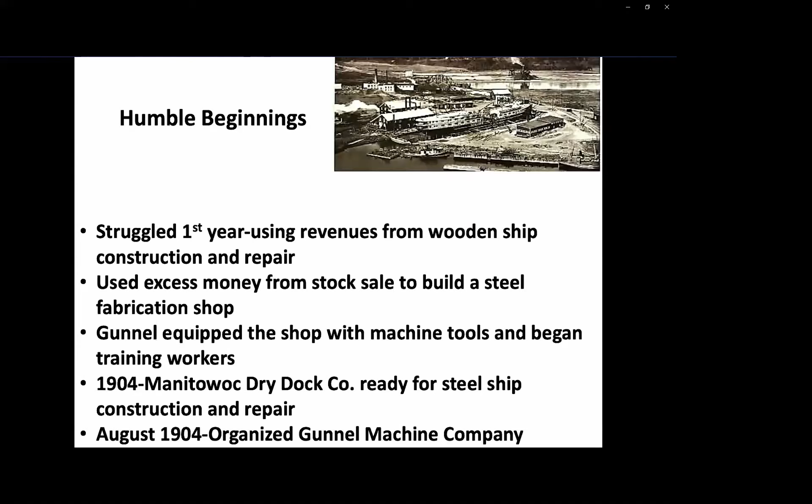Also in August of 1904, Mr. Gunnel organized his machine company.

So growing the company, one of the hallmarks and one of the things I always heard all the years I worked for the Manitowoc Company was: you must diversify. It's the three-legged stool. When I worked there, it was shipbuilding, cranes, and ice—three-legged, diverse businesses. So the Gunnel Machine Shop built the winches, the hoisting gears, and machine parts.

The goal of these gentlemen was to grow the business and manufacture all the major components for shipbuilding. So in 1909, they purchased the Manitowoc Steam Boiler Works, which gave them the ability to build their own boilers for shipbuilding, but also diversified into building digesters, furnaces, kilns, dredge dippers, ladles, buoys, and heavy buckets. They continued to make purchases, acquiring the Manitowoc Foundry Company, which gave them sources for casting.

In 1910, they delivered the steel hull Alabama, which at the time was considered the finest passenger vessel on the Great Lakes. Mr. Gunnel was the leading designer on this, also overseeing all of the production, including the first steel plate that went down to the very last joiner workpiece that went in.

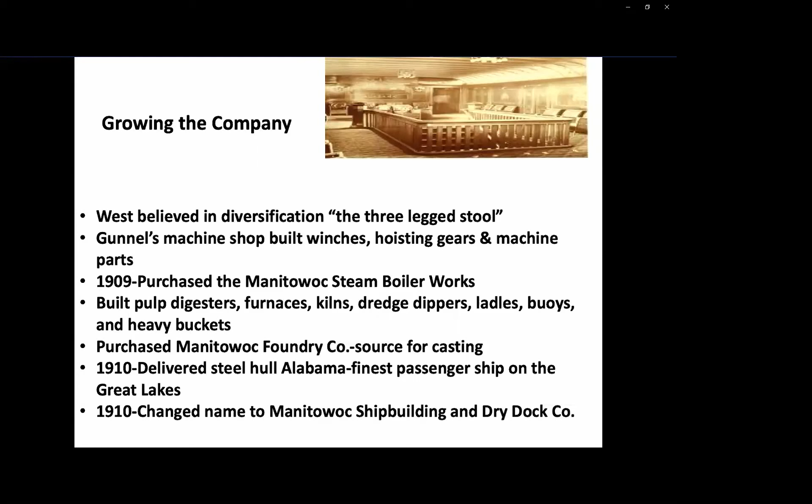Of course, as they went through history, World War I was looming. In 1916, they received orders for freighters from Norwegian and British companies. However, the U.S. Board of Emergency Fleet stepped in and purchased all the freighters under construction for their use, and the Manitowoc Company delivered 33 of those freighters.

Mr. West was also very highly regarded in the shipbuilding industry, and Henry Ford had started a shipyard in River Rouge, Michigan, to fabricate submarine destroyers known as the Eagle boats. However, they did not have the know-how to get that business started.

So it says that Mr. West was recruited. I feel as though he probably had his arm twisted by the government in order to go there and get that going. So here's another hallmark.

They sold $500,000 because they knew they had to upgrade their shipyard for a shipyard expansion. The shipyard then occupied the entire peninsula. They had 65 buildings, 7 cranes, telephones, floating docks, and railroad systems throughout the yard to bring materials in, to bring pieces to the build site, and to transfer sections. It was considered to be an extremely modernized shipyard.

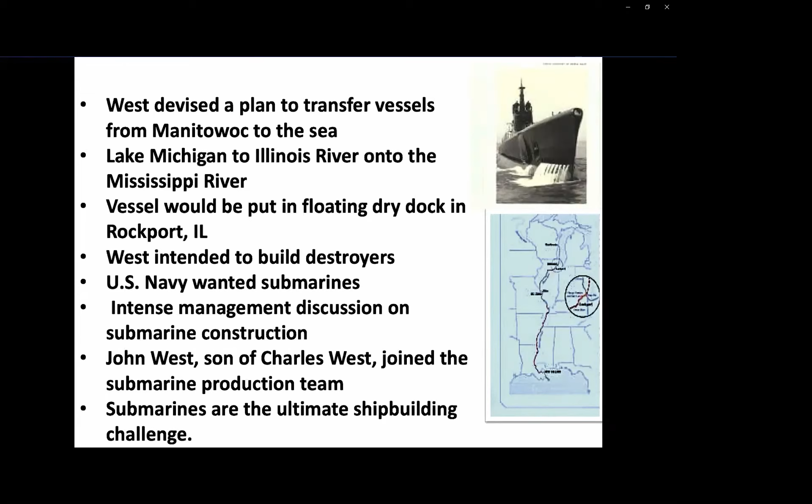One of the other things they did was bring in John West, Mr. West's son, to join and head up the submarine production team. Submarines are the ultimate shipbuilding challenge. I have a picture of one of the submarines in the dry dock that they built during World War II.

So the Manitowoc construction team was a little uneasy going forward with building submarines. The government said they would form a partnership between Manitowoc and Electric Boat—and Electric Boat still builds nuclear submarines for the United States Navy even to this day.

Mr. West also had a relationship with the gentleman running Electric Boat. During a tour, they were walking the shipyard together, and Mr. West looked at what they were doing and said, 'Damn it, Armin, if these fellows can build submarines, we can too.' And that was it—that was the decision. They were going to go forward with submarine building.

The agreement was formed with Electric Boat, where they would help with technical design and put personnel into the shipyard to oversee construction. In September of 1940, Manitowoc received the contract for the first 10 Gato-class submarines.

The submarine construction was to take place indoors. They were very concerned about contamination and weather conditions, so the decision was made that these submarines had to be built indoors.

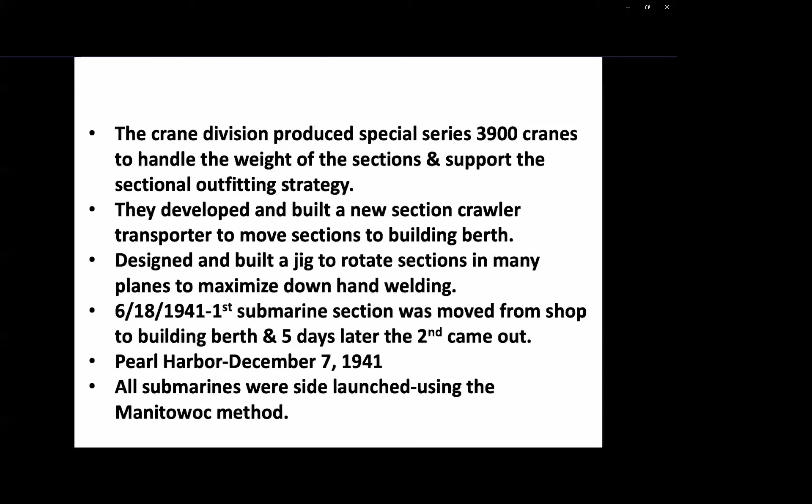All submarines were side-launched using the Manitowoc method. The United States Navy at the time was very fearful of this method. Manitowoc engineers convinced the Navy, and they did a series of testing in order to prove that this method was safe and was the best way of doing it.

So I have a picture of the Manitowoc in the time building sections. You can see them lifting a section with their 3,900 cranes onto the building berth.

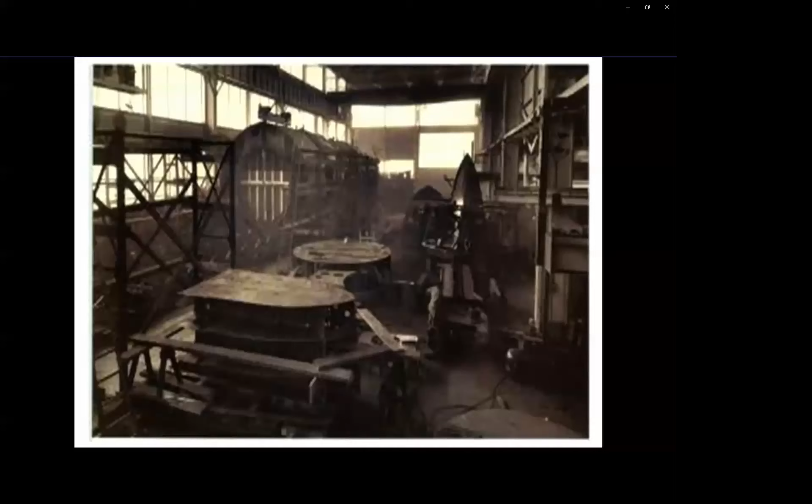A shot of the shop, and you can see some of the sections from the submarines, and you can kind of make out the jigs, the turning jigs that they designed for turning parts and pieces of the submarine in order to assure welding quality.

And here we have a picture of the submarine out on the building berth where they're joining the sections together.

And a picture of the shipyard during World War II. The square building that you see is actually the main office building. It has an interesting history. They moved that building using their dry dock to this area on the peninsula, and then it was remodeled during World War II.

And of course, a picture of the famous Manitowoc side launching of submarines. The original thought was that they were going to take the submarines to the Gulf and do the tests down there, but the government wanted the submarines badly, obviously, after the Japanese attack, and so sea trials were taken off of Sheboygan in 300 feet of water.

In February 1942, West was called to Washington, D.C. to also build new landing crafts to ferry tanks and equipment. Manitowoc designed and built the first 36 of these units and were the lead yard in 400 more units. The units were designed by the engineers at the time to be bolted together, so steel plates could be manufactured throughout the Midwest, brought to Manitowoc, assembled, and then delivered.

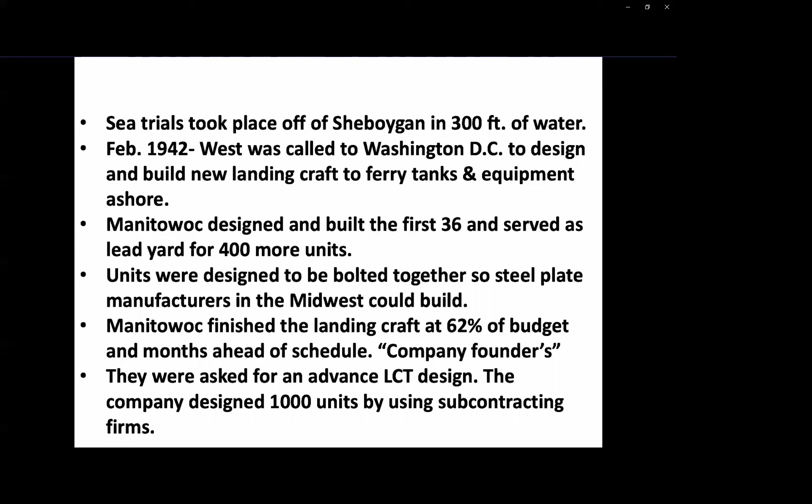In June of 1942, the Manitowoc Company was awarded the Balao class submarines, a little bit different submarines than the original ones, an upgrade from the original ones that they were building.

Their crane market was also going great guns. They sold 278 cranes during the war to the military. Peak employment in the little city of Manitowoc was 7,000 people. Time magazine at the time wrote an article that referred to the workers as cheesemakers and cherry pickers. Mr. West took great offense to this statement. Workers were trained under the Gunnel Plan and were some of the most highly skilled workers in the country.

Manitowoc built a greatly detailed wooden mock-up of the entire submarine, all the pipes, all the gauges, all the wires, everything in a wooden mock-up. And that mock-up was used and saved them a ton of time by the engineering and the construction group.

And in remembering what happened to Mr. West in the First World War, Mr. West was already planning in 1943 for the direction of the company in the post-war era.

Some of the things that were happening, just interesting, they had a little newspaper that the company published called the Keel Block, and that was published well into the 1970s, 80s, 90s. It's a piece of communication between the management team and the workforce. During World War II, they had a women's softball league. They had their own hospital.

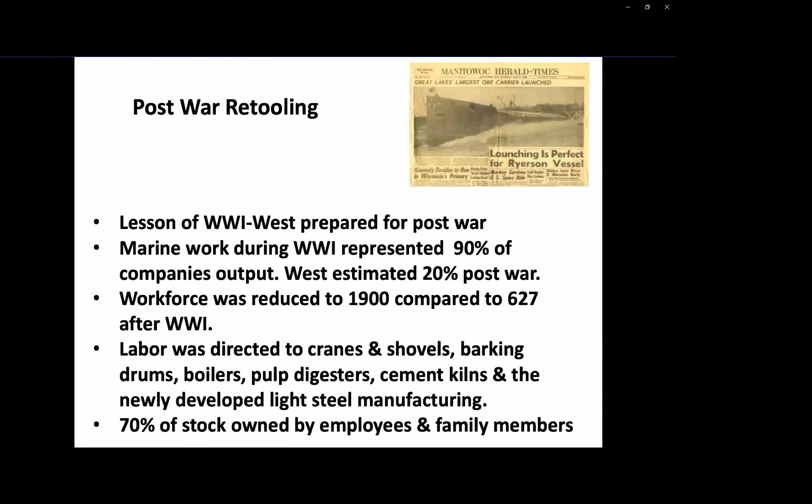70% of the stock owned by the companies were employees and family members. Remember, after World War I, they were forced to sell the company because the stockholders that held the stock wanted their money. Here, the stock was owned by the employees and family members. The stockholders were paid a 3.25 dividend. The company was debt-free. So they moved past the war.

In 1950, the Bradley Company line of U.S. Steel awarded a contract for the John G. Munson, Hull 715. This was a mammoth ship at the time. It was 660 feet long, and it was a self-unloader. A very large ship.

In 1952, Manitowoc Shipbuilding Company became Manitowoc Company with two wholly owned subsidiaries, Manitowoc Shipbuilding and Manitowoc Engineering Company. John West, the son of Charles West, was promoted to president.

A lot of their business after the war was also in converting and retrofitting many of the ships. And also during the 1950s, they received orders from the American Steamship Company for the John J. Boland, the Detroit Edison, and the Adam E. Cornelius.

Shipping companies were demanding, however, that larger capacity vessels with fewer men be built. This is what the customers were telling Manitowoc Company. And a sad day, Mr. West, the original founder, died on 10/3 of 1957 at the age of 80.

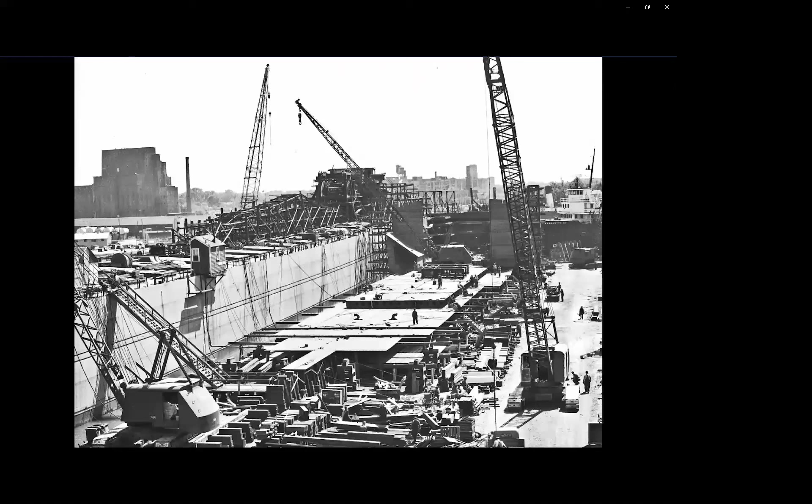Here's a picture of the Manitowoc Company building one of those large vessels up on the ways. You can see the number of cranes that they're using. You can also see some of the conversions and some of the repair work that they're doing. Very, very busy shipyard. Not as busy as World War II, but very busy. They had gone from military work to commercial work.

In 1960, they received the contract for the Edward Ryerson. It was 730 feet long by 75 feet wide, the most powerful, largest vessel of its day on the Great Lakes.

And then what happened? There were some game changers that happened. In 1968, the Poe Locks at Sault Ste. Marie opened, allowing for 1,100-foot ships to transfer from Lake Superior to the lower Great Lakes. In 1970, the Merchant Marine Act allowed the Great Lakes shipping owners to gain guaranteed government mortgage loans.

There was no room for shipyard expansion in Manitowoc in order to meet the needs of the future shipbuilding. And of course, the Jones Act, which requires that all ships that start in a U.S. port and end in a U.S. port be built in this country.

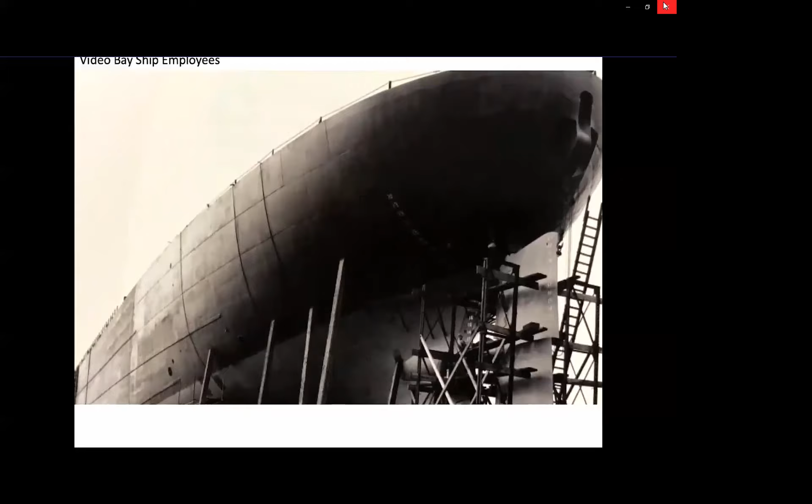I originally started at Manitowoc in 1952 at the shipyards. In 1972 we moved to Bay Ship here. The building program started in 1972, and we began down south in the South Yard building the smaller boats. The first 1,000-footer had its 700-foot section built down south, and the 300-foot section built up north here, and that led into the stern section being built, before the graving dock was built.

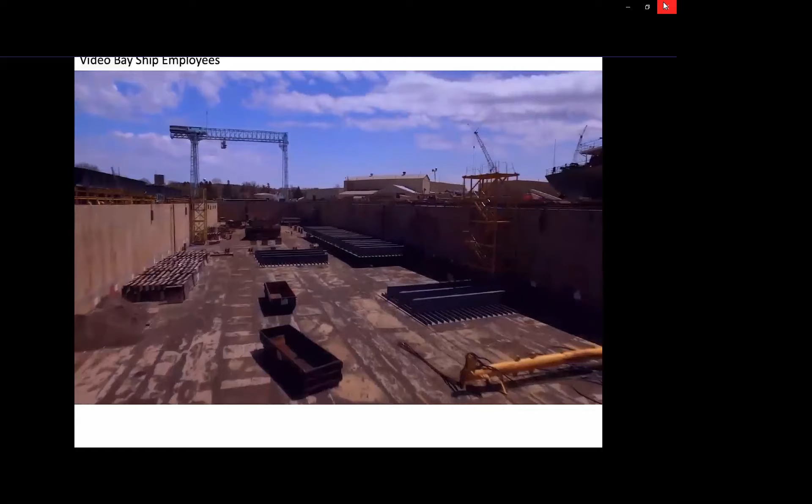I think the graving dock opened up the ability to construct 1,000-footers and also the ability to dry dock 1,000-footers and work year-round to not only do new construction but repair work. So both of them are a key part of the business plan.

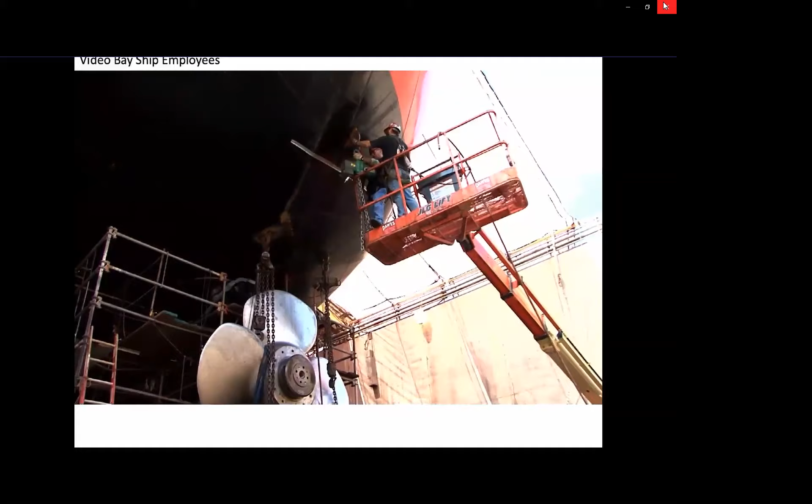The job I did for the last 25 years at one time was done drawing and nailing on the floor. I draw the boat out full size. And then 25 years ago I moved and started computerized lofting on AutoCAD. Did that for the last 25 years.

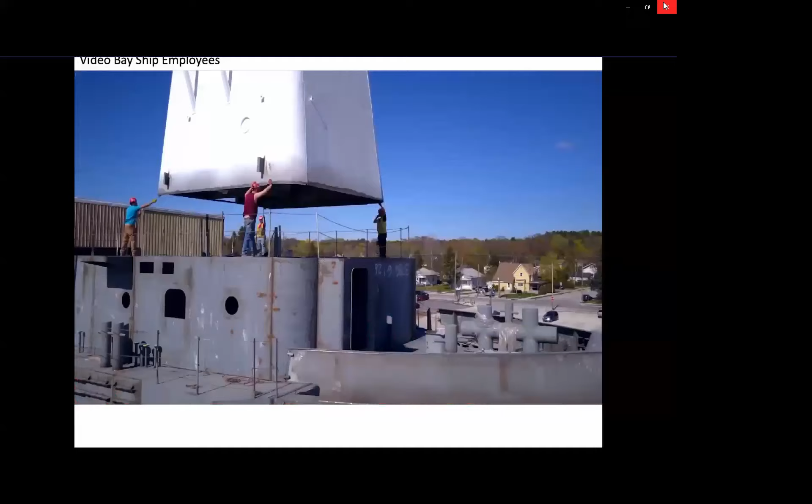I don't think there's anybody that lives in Sturgeon Bay that either hasn't had a family member or doesn't know somebody personally that either works here or has worked here. That's how deeply rooted this facility is and this business is in Sturgeon Bay.

Well, it's quite important here. Years ago there were quite a few facilities on the Great Lakes in the shipbuilding industry, you know, Toledo, Lorain, Superior. Some of them have gone by the wayside over the years. So we're one of the ones that held in there and stuck with it.

The jobs attract people. They come from all over, mainly northeastern Wisconsin, but also upper Michigan, and all over the United States actually. And each of those brought something to them that they can help the community with or add to the community, or brings up the level of experience in our community.

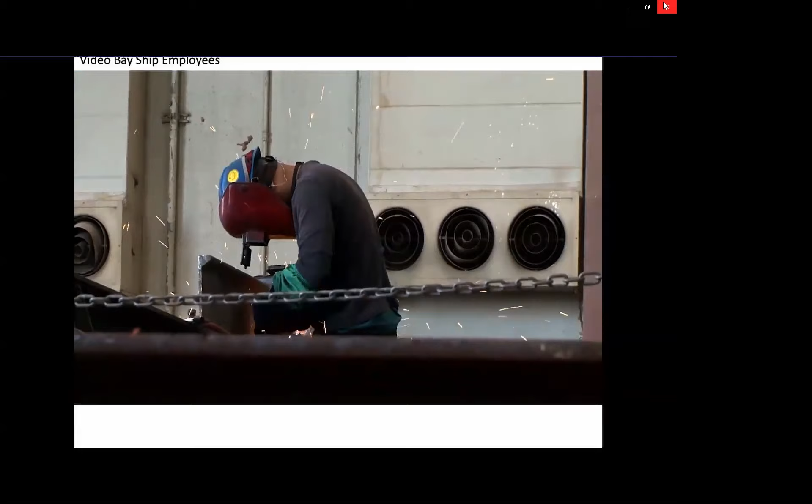Bay Ship has really been kind of silent about what they do in our community, and they don't really seek out a lot of attention, but they really do commit. I mean, not just in terms of what they do for payroll and the money that flows through our community, but just in terms of donations and helping our community out.

Shipyard, in my opinion, is everything to the community. It's the most impressive event about Sturgeon Bay. When you go around different places, we were fortunate enough to go to Europe last summer, talk to the Fincantieri people in Italy, and get pictures of the shipyard where you work, and everybody knows big ships and likes big ships, so it's kind of a worldwide thing.

I think there's a great deal of pride in building a quality boat, and the size of the vessels amazes people. Well, the nice thing about Bay Ship over the years is that we've established a partnership, I think, between local government and the business community, but specifically Bay Ship.

As a result of that, I hope the city has been able to help Bay Ship grow. And the amount of dollars that flow through our community as a result of Bay Ship, it just can't be taken for granted. I mean, we always have to make sure that we're doing everything we can to make sure that Bay Ship stays viable, that they're profitable, and that they continue to employ thousands of people.

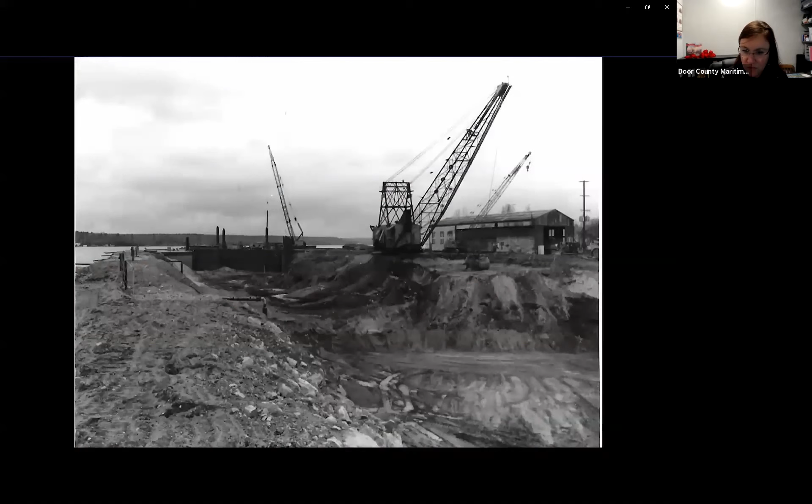This is a picture of them digging the graving dock. You can see it's a very massive hole. On the far end of the picture, the very first thing they did was pound piling to make a piling wall to separate and keep the water out, followed by the gate structure that also was intended to keep the water out.

Now I think what we'll do is a little bit of a flyover to take a look at the facilities.

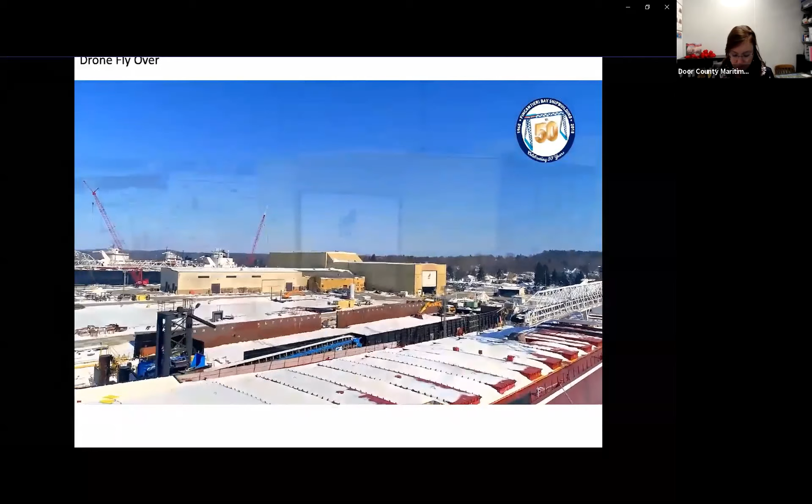So I have some pictures of some early vessels that were built. Hull 716, the first of the 1,000-footers, the Belle River. She was 1,000 feet long, 105 feet wide, 56 feet deep, with a capacity of 80,900 gross tons and an unloading rate of 10,000 tons per hour. It was propelled by four 3,500 General Motors Electro Division EMD engines, had 37 hatches, and was built in 1977 for the American Steamship Company. It is now currently known as the Walter J. McCarthy.

The second of the 1,000-footers, Hull 717, the Lewis Wilson Foy, was much the same. The third, Hull 718, was the Gott. The Gott was a little bit of a different animal; it did not come out with a swing boom, it had a shuttle boom instead. It also did not have EMD engines, but two 19,500 diesel engines. Those engines have been removed and repowered over the years, and a swing boom has since been put on this vessel in place of the shuttle boom.

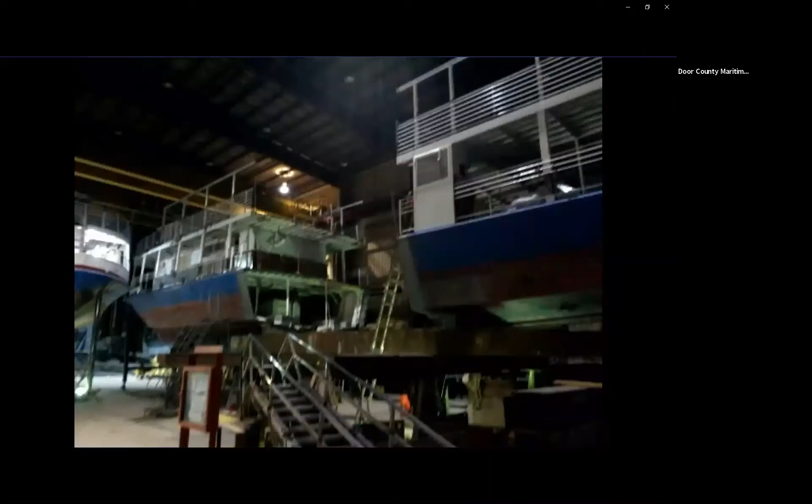We also built 2 boats, the Evening Star and the Morning Star, for a customer in Chicago, kind of a passenger tour party boat, so to speak. A little bit later, we received the contract to lengthen those 2 vessels along with one of their other vessels.

This shows a picture of how we brought the vessel into our 311 construction building. We cut it in half, pulled it apart, and set a new section in. Lowered the section in, welded it in place, and re-outfitted the ferry boat. Then we put it on our section carrier and brought it outside where it was finished painted.

We built our Hull 752, which was an ice class ferry boat, the Arnie Richter, for Washington Island ferries. There's the Bright Star.

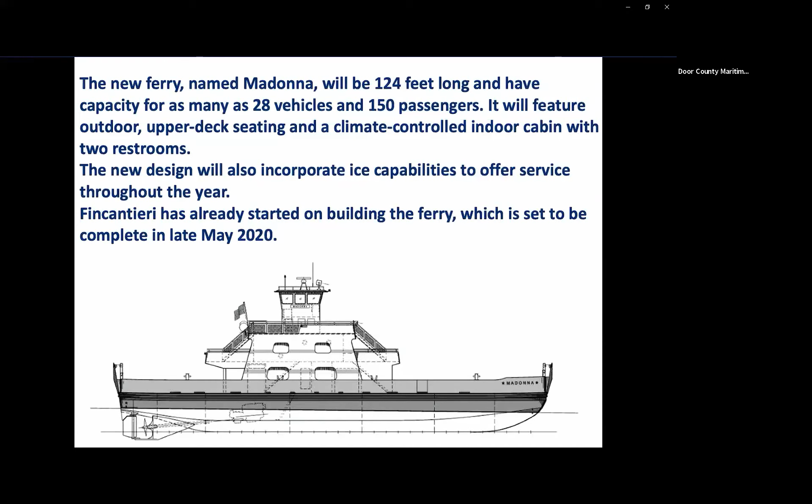A new ferry, the Madonna, was constructed and delivered this past spring. It was 124 feet long with a capacity of 28 vehicles and 150 passengers. It featured outdoor upper deck seating, a climate-controlled indoor cabin with 2 restrooms, and was designed to incorporate ice capabilities to offer service throughout the year. It was delivered in May of 2020.

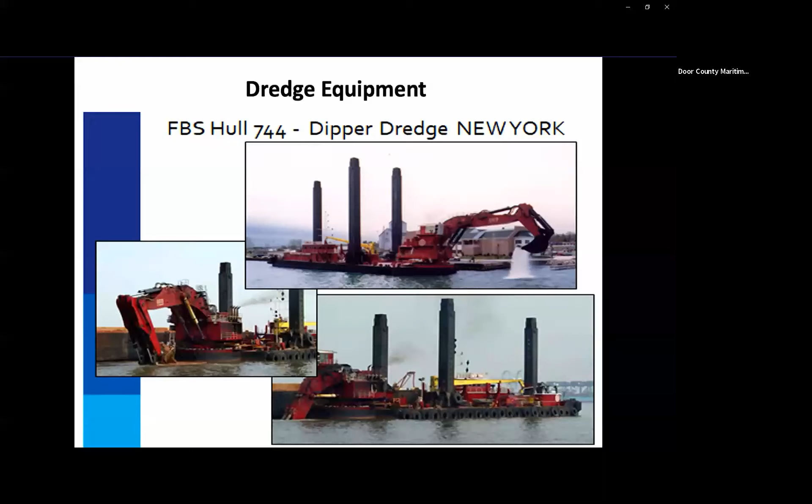We also took a very active role in the dredging market. Here's a picture of the Dipper Dredge New York, which we built for Great Lakes, with a 17.5-yard bucket. We also built a suction dredge, the Liberty Island, for that same customer, and a cutter dredge called the Jimmy B for a customer in Michigan.

We also built several of these dump barges. These barges were kind of the Manitowoc Company design, and we had the original patent on these. They were filled with dredge spoils, brought to a dumping site where the owner could start the generator and dump the spoils remotely from the tug.

Then we got into the petroleum industry. We were very fortunate to get into it. We built a series of chemical and oil hauling tugs and barges. This is our Hull 757, the Barge Georgia.

As you can see, we built many of these tugs and barges. It was a very good industry for us. We built the tug Mayville, our Hull 786. We had to get very creative because we wanted to build the tugs inside the building to maximize our production efforts and then roll them out. So we came up with an idea, and we'll play that video for you.

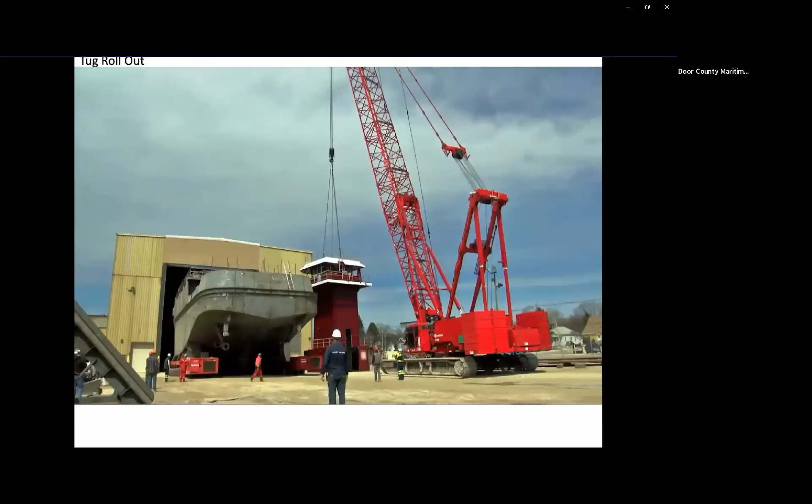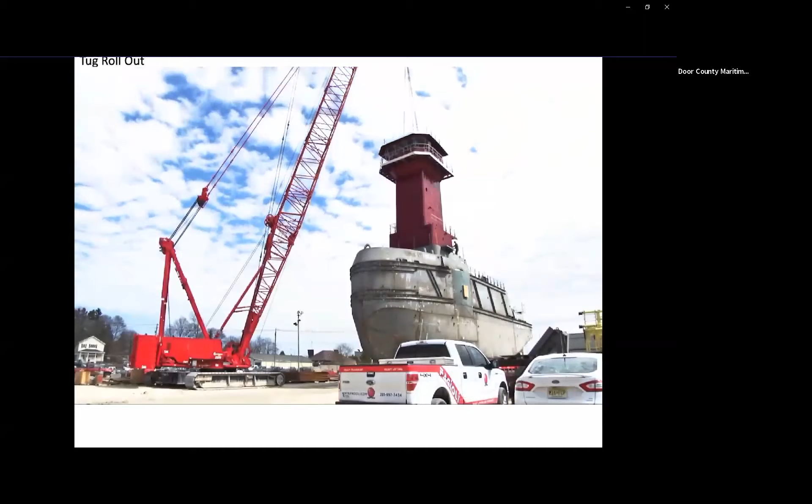As you can see in the video, we would start moving the tug out of the building on a Friday afternoon and evening, with a crane standing by with the upper structure pilot house. It would swing over, and Friday night the house would be fit. Saturday morning, the vessel was moved with the section carriers onto the dock, dropped on the preset keel blocks, those units were removed from the dry dock, and then the dry dock was brought forward to be finished in the north yard by the tugs.

We also were big into the cement hauling business. We built a series of highly automated barges requiring no human intervention except from one control station, which was the request of the owners, and we did deliver on that. We built a 740 barge and a 760 barge as new construction. Then, just recently, we were asked to take an old cable laying barge and convert it into a cement unloading barge, which we did, called the Barge Commander. Also very highly automated.

We built a series of 3 platform supply vessels, again a very complex vessel. It had dynamic positioning where they would position the boat next to the oil rig and tell it to stay there. The boat, within 4-foot seas, would maintain its position while the ship transferred product onto the platform and then received product back from the unit. We built 3 of those.

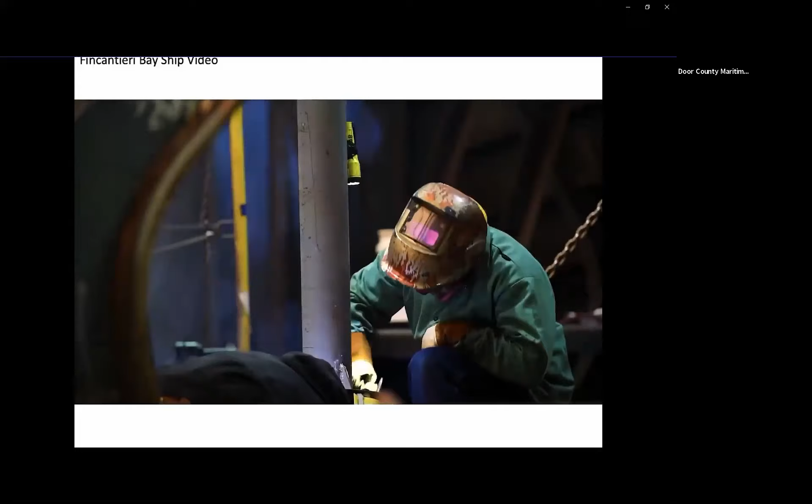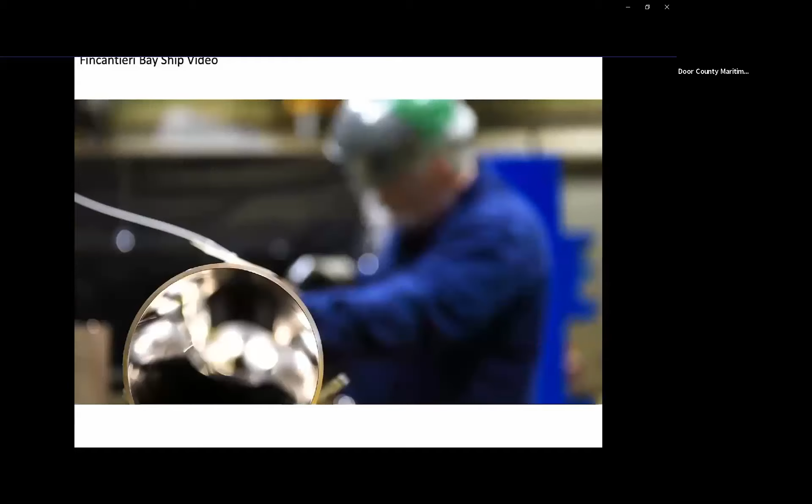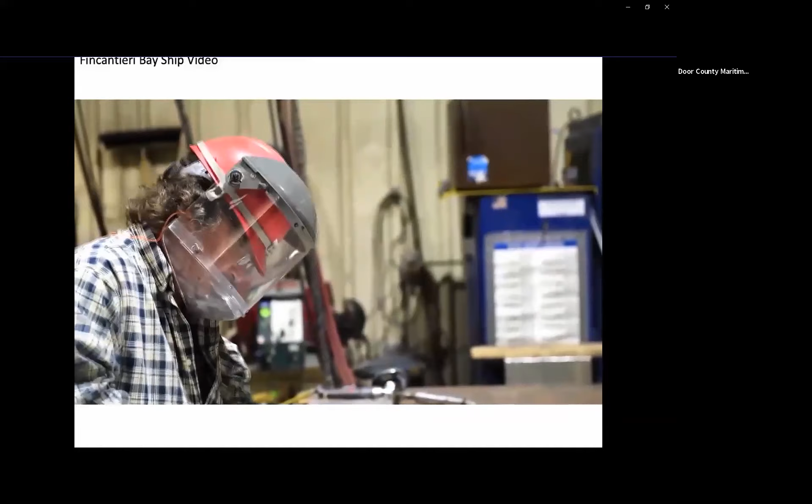The exceptional men and women of Fincantieri Marine Group feel a special passion for the complex ships that they build. Pride in the ships that carry America's finest into harm's way and that protect our nation's interests around the world. Pride in the vessels that keep commerce flowing through the Great Lakes region and the rivers and seas beyond. It's a passion that has at its foundation the work ethic and master craftsmanship that is the heritage of Midwest communities. It's a passion that stems from our values and goals.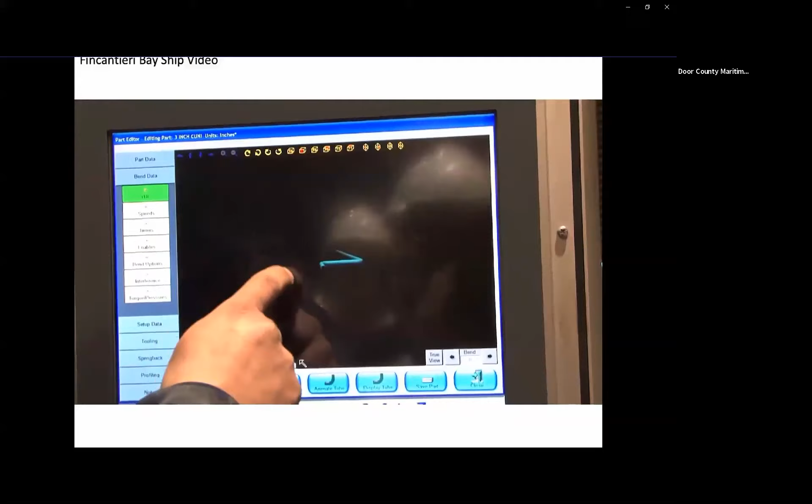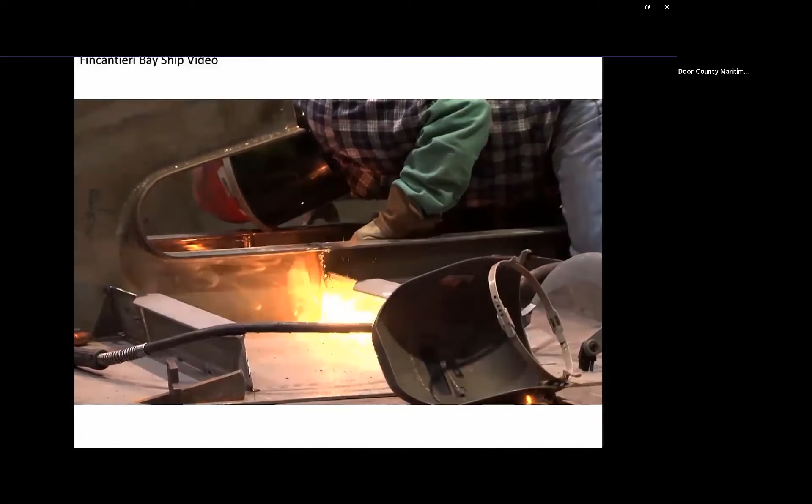To embrace tradition and innovation, to lead the industry in quality and efficiency. To place first the safety and well-being of the people in the shipyard and aboard the ships. To build with pride partnerships with our communities and our customers.

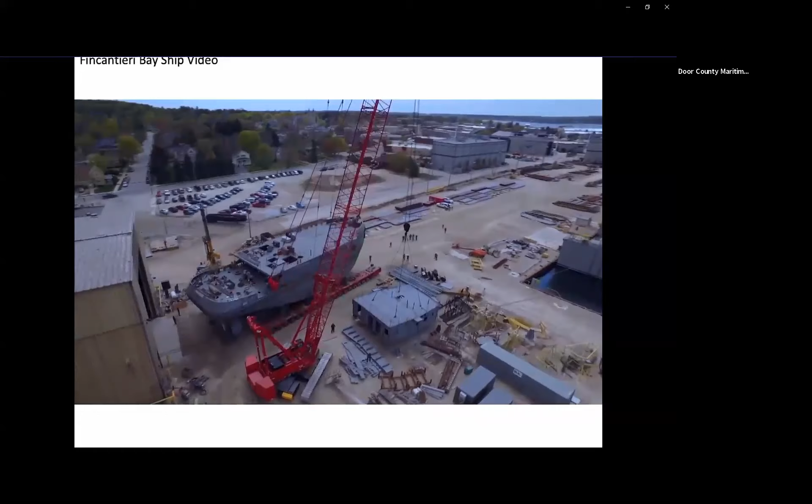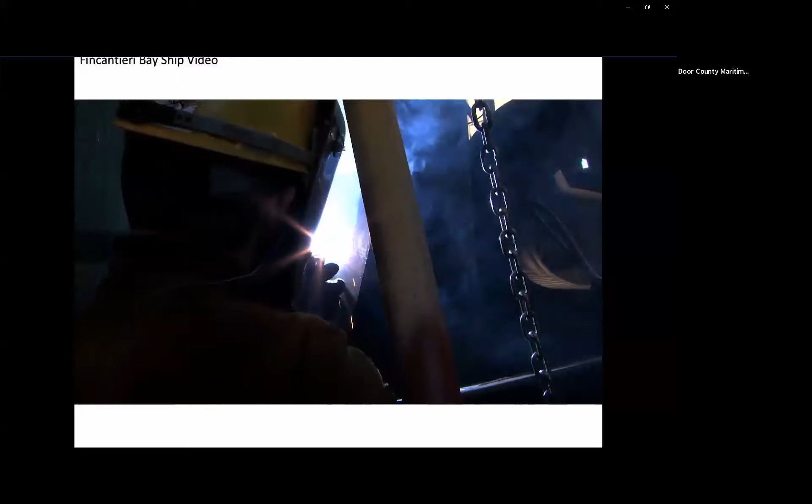The people of Fincantieri have been building ships with passion for more than 230 years, and have delivered more than 7,000 ships to military and commercial customers. Our individual talents span the skilled trades and multidisciplined engineering skills that it takes to design and build a ship.

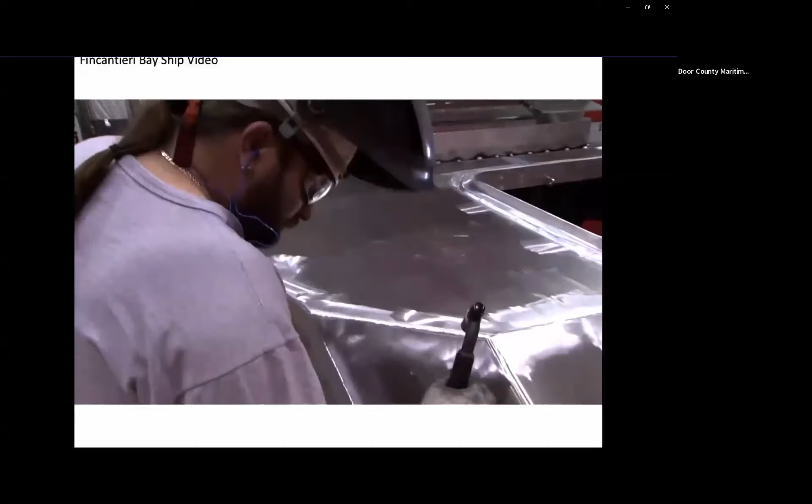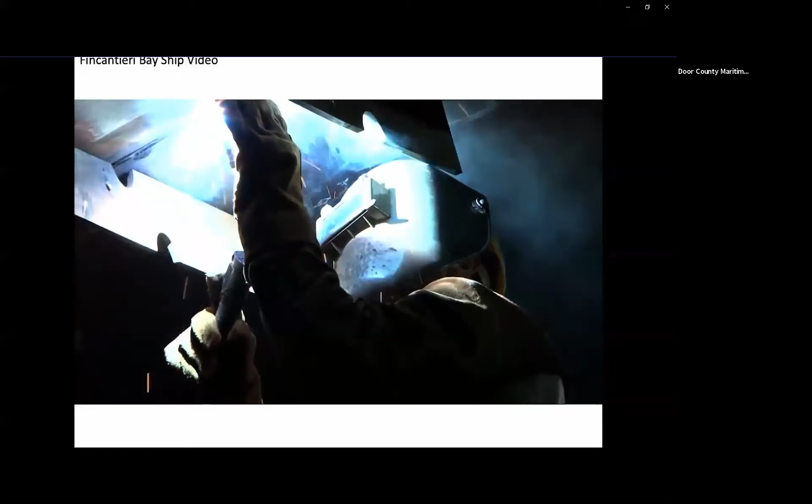We're backed by many thousands of suppliers, businesses large and small, located throughout Wisconsin and across the United States. We recognize the invaluable contributions of the almost 3,000 professionals that comprise our shipbuilding teams, and we're deeply committed to employee safety, well-being, and growth.

We've invested hundreds of millions of dollars in equipment and infrastructure improvements to transform our U.S. shipyards into shipbuilding powerhouses, now with the ability to build large, complex vessels in serial production. Worker safety is, and will remain, priority one.

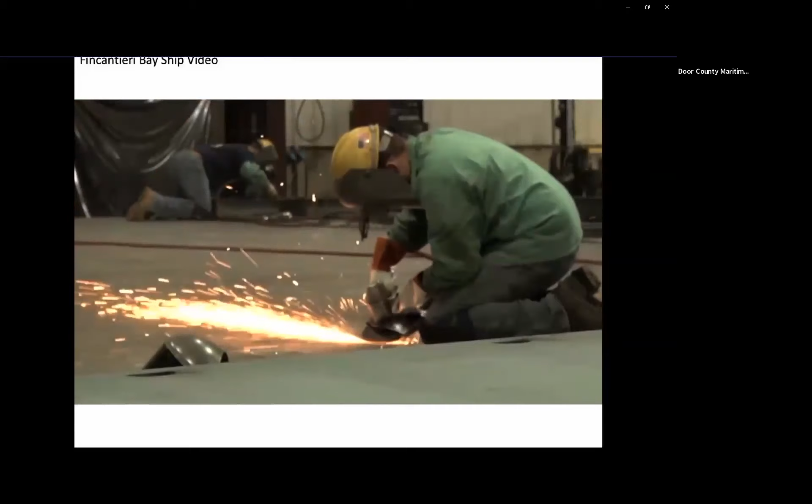We could not do what we do without the communities where we reside. We so recognize our responsibility to support and embrace the communities where we work and live. Giving back to our communities takes many forms, including active participation and leadership in charitable and community events.

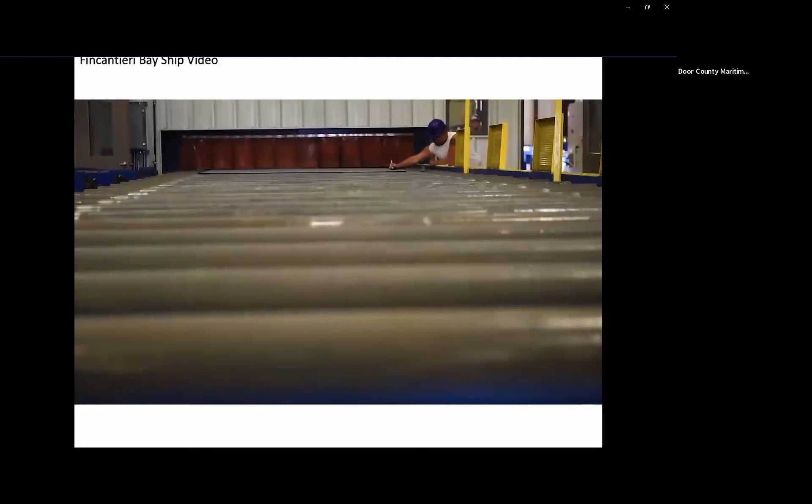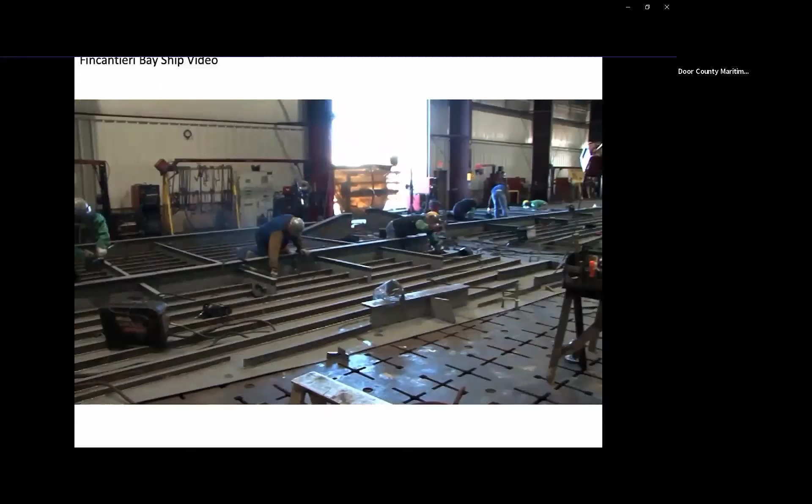Yes, the ships that we build reflect our goals and values. They represent excellence in manufacturing and are the product of a talented team of shipbuilders using their hearts, hands, and minds to write the next chapter of America's storied heartland. This chapter will create new jobs, strengthen America's powerful industrial base, bring prosperity to our communities, provide opportunity to a new generation of our citizens, and defend our liberty around the globe.

Then there became a very unique opportunity for the shipyard. The old Palmer Johnson property, which was our neighbor to the south, decided that they were no longer going to be in business and were moving their operations overseas. The shipyard was up for sale, and the Fincantieri company decided that this was something we needed for yard expansion. So they purchased it, and you can see here the main building, the paint building.

All the buildings and property were built and remodeled by Bay Shipbuilding, now Fincantieri, and that remodeling continues today. If you follow the news, Fincantieri North American Operations has received a contract from the United States Navy to build the next frigate, and part of that will be done in Sturgeon Bay. So there's more building construction going to the south, and many of these buildings are being remodeled at this present time.

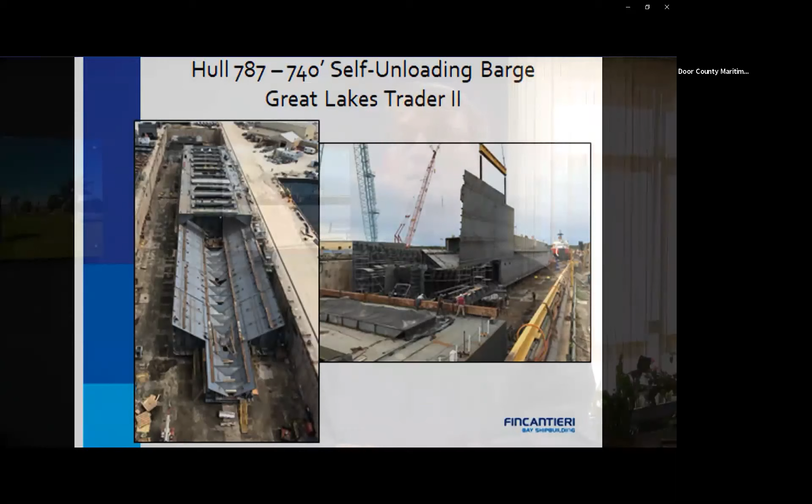Okay, this is a picture of the 787, 740-foot self-unloading barge, Great Lakes Trader 2. This is a picture of it being constructed in the dock. As I indicated, it was just recently delivered. A little bit about the characteristics of the barge: it was a 740-foot barge, 78-foot beam, 45-foot draft.

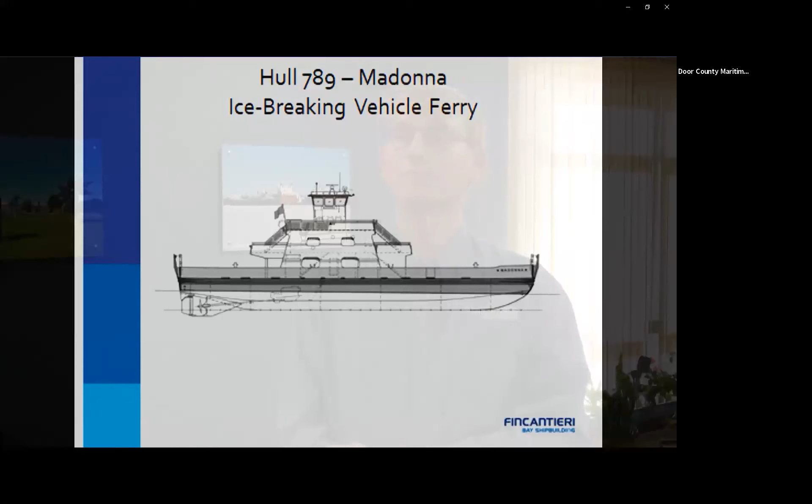So we actually have two vessels being constructed in the large dock, and this is the second one. This is Hull 790, a 5,400 cubic meter LNG bunkering barge. I'm sure many of you saw the tanks for this barge that were delivered from a heavy lift ship a few weeks ago, moved around the shipyard and installed in the vessel. I got several calls from folks wondering what in the world those tanks were. The tanks are for this barge.

Some of its characteristics: 340 feet long with a 66-foot beam.

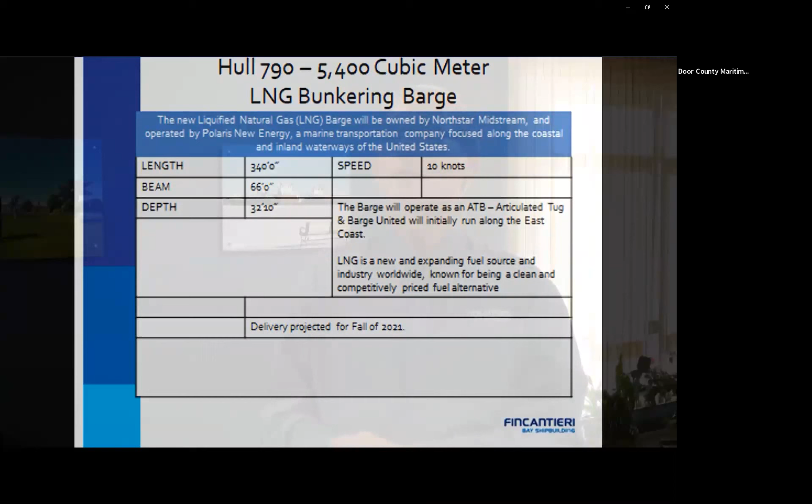And of course, what would a retired shipbuilder after 46 years do? Take a ride on a boat.